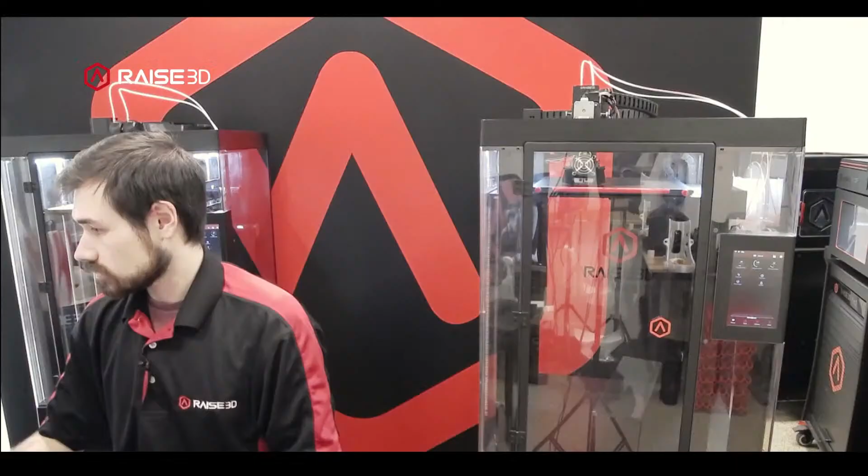So for today, just going over some questions that have been sent in to us. We had some really good ones coming in through social media and our emails and stuff, so I can go through those. We'll just be talking about more general things: the material, the slicing software, our API a little bit, maybe getting into cloud. So topics are going to be really broad today. And then I'll also be doing some maintenance work, some close-ups of just working on the machine and calibrating it.

I know we had a maintenance stream earlier. That's going to go a lot over the steps of exactly what I'm doing, walking through that. But today I'll be working on the machines and just kind of talking about the questions that we have going on. But before I start working on the machine, the one question that I did want to go over initially was someone asked how to print TPU. And there's kind of a lot to go into for that specific material, certain setups and the settings and what to look for when printing TPU.

So to go over that one, the TPU material is a lower temperature material. It's closer to PLA in how you would treat it, but that's mostly just because all the other materials would be a lot higher up. TPU, temperature-wise, is higher temperature than PLA. Sometimes it likes to have the bed completely cold. Sometimes it likes it more at 60. It's going to vary from brand to brand because there's a lot of different types of TPU, so everything might be slightly different.

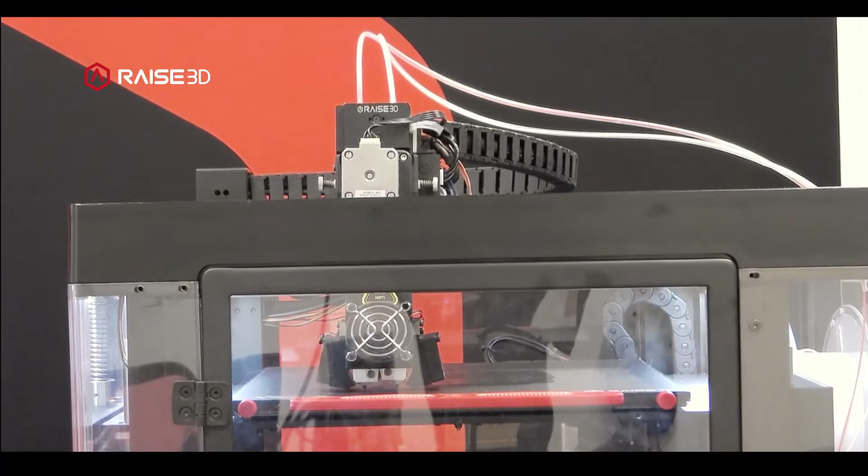With the lid off, so we're dealing with our temperature, the next thing I would want to look at is the extruder tension. Since TPU is not as rigid as any other filament you would be running, we have to contend with the lack of structure as it gets pushed through the print head and out the extruder. For a rigid material, we don't want to fully crank down on the extruder tension. Usually we'll go pretty tight and then back it off 3 to 5 turns to give you a decent tension. That's going to help it feed better.

But for a TPU, we would actually want to loosen this up quite a bit. And typically I'll go to a distance just where we can remove the thumb screw and then tighten it in a little bit more just until it's starting to tighten up again.

Or if I'm running the load procedure from the touchscreen, I can just go in here, start loading. Once it gets up to temperature, it runs the filament feed motors. So while the feed gears are running, I would just load the filament in, have this undone, and then tighten it down just to where it starts loading and the thumb screw can be stable in there. And then that's the tension I would set. So we do want to have a really light tension on the filament when working with that TPU material.

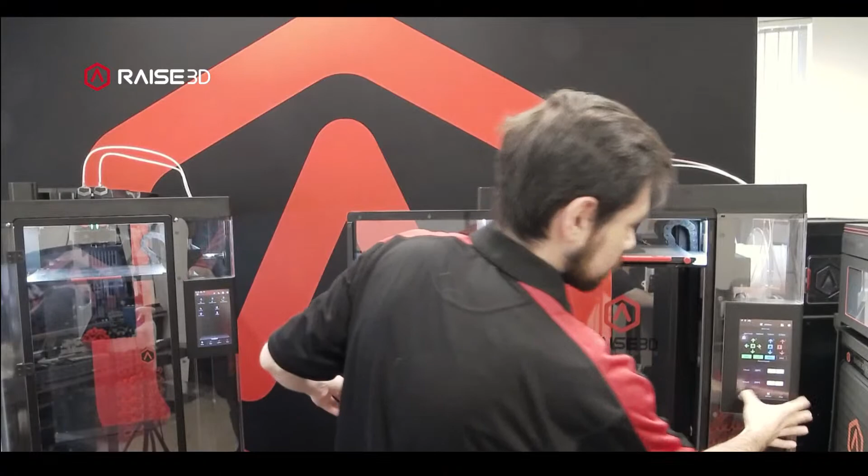So in addition to having the machine set up with that low extruder tension, and then making sure the enclosure is appropriate for which machine you're running, next we'd be looking at the actual slicing settings for these materials, and it can vary a little bit. The biggest ones are going to be something like a Polyflex, a NinjaFlex, and then of course our TPU95A by Raise3D.

So we do have options for running those different materials just under resources at the top of our website, and then under the Open Filament program is where we would find the templates for our TPU materials. So again, if we're working with the Pro 2, we already have those templates ready to go. The ones for the Pro 3 will be coming out in the near future, so you can keep an eye on when those will come out. But working from these materials, there are options in here for Print Life's Yoga Flex. That's a flexible material. And then more specifically, we want to hit those 3 that I mentioned before, looking at the NinjaFlex and the Polyflex.

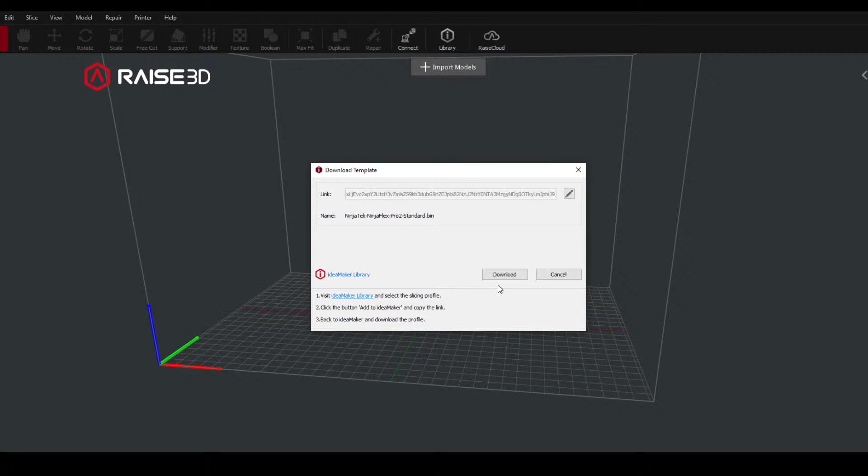So I'll go ahead and do our NinjaFlex profile, import to IdeaMaker. That's just pulling it over with a link. And then with that copied over, since I already had IdeaMaker up, it recognized that I was putting in a link. If not, I can just copy it here and then download. So now I have our NinjaFlex template ready to go, and I'll add that into our NinjaFlex material. So let's see.

Then switching it over to our Pro 2, they just need to see that template. So let me import that again. I think I imported it into the E2, and I do want to have our Pro 2 up for that one. So there we go. So now importing it in, making sure that we're on the right material, and NinjaTek.

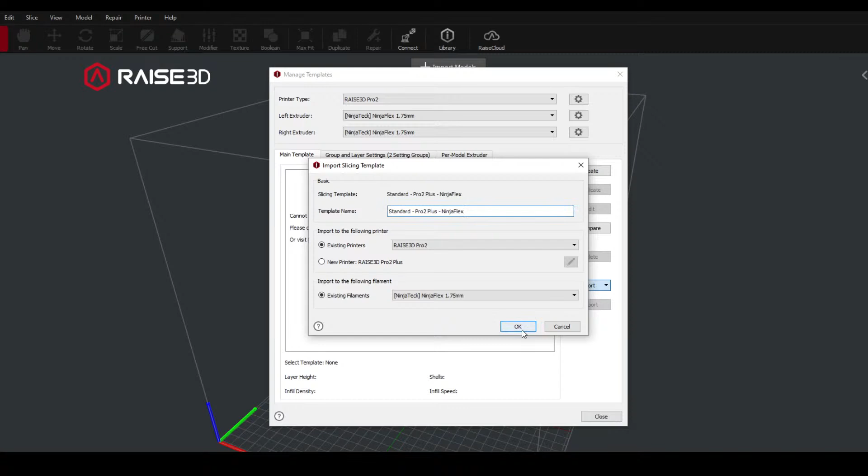So then with the template in here, I'm just looking at the differences between the NinjaFlex template and then our TPU95A, that's the Raise3D one. I can go ahead and compare, pull up the templates here, and then switch over to our TPU95A. Looking at the Polyflex templates, the differences between those are just differences in the flow rates. Fan control speed can be different, so the NinjaFlex does use full fans for cooling, and then the Polyflex will run it a little bit lower. Same thing for the heated beds, they do run a little bit differently. And then a lot of the speeds are different. NinjaFlex is slowed down quite a bit for these templates.

The most important thing is basically starting off with one of these templates to work with, and then from there we can fine-tune things to deal with some of the issues that might be coming up really commonly with TPU. Looking at the Polyflex, NinjaFlex, and then comparing our TPU95 to the NinjaFlex here, we are again running a slightly different retraction amount. The flows are higher on the NinjaFlex, and the temperatures are about the same, but fewer things have been changed from this one to the Polyflex template.

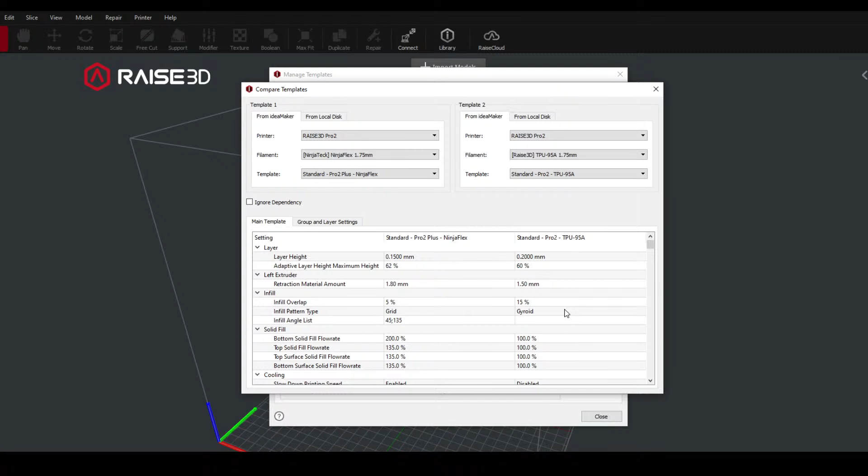But mainly I just really want to reinforce that getting started with these templates for these materials is going to give you the best chance. And then depending on exactly the print results that you're seeing, I would recommend more specific changes. Like we can adjust the temperature slightly, that may help. Cooling, we have the options here. So if we're working with areas that have really fine details, they might need a little bit more cooling or a little less temperature. So we can add in specifically what layers those are taking place, and then change our speeds at those layers. Same thing with the temperature control. If we did have that enabled, we can adjust those and fine tune those. For the other options, usually I see a lot of stringing in TPU, and for that, it's going to help to enable a little bit of coasting distance.

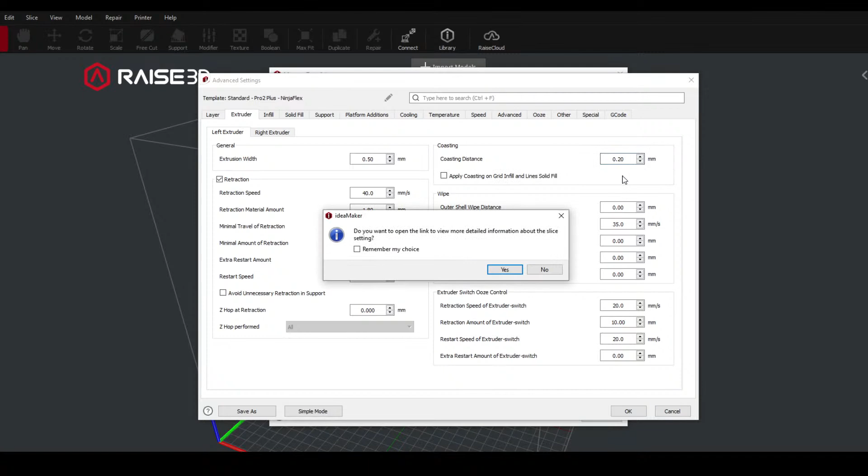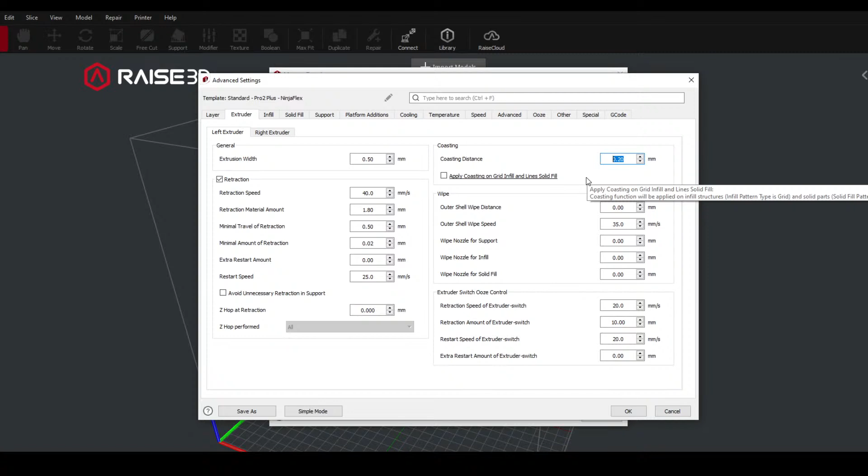Usually I'll do like 0.2 millimeters. Basically, that's just going to stop the extrusion before it gets to the end of the filament path. So any back pressure in the nozzle is basically going to fill that gap and reduce the stringing as it moves past that wall onto the next section of the part. Z-Hop can help a little bit just for that travel, but the biggest one is probably going to be coasting for that string at the end.

And then usually it's difficult to get perfectly clean prints off of TPU. More often than not, there will still be a little bit of stringing, and then I'll go over it with a heat gun and just kind of melt those wisps away, and they really aren't noticeable in the part afterwards.

And then, just going through the rest of the questions here, if there is an N2 Plus trade-in program. I believe that we do have some kind of trade-in program, but I unfortunately don't have all the information on that right now. It's actually best, if you are interested in looking for a trade-in, on our main website, just calling our phone number or emailing inquiry@raise3d.com, just contacting us directly.

Then we can get you in contact with the sales team, and they would actually have information on if there currently is trade-ins and how we would go about processing that and what you'd actually get out of that. But for more information on trade-ins or the opportunity for any machine really, it's best to just reach out to inquiry, or call sales directly.

And so, next question is how to get the first layer perfect every time. And that actually is kind of a more interesting question because it depends on what you mean by the first layer. I'm assuming the first layer is printing directly on the bed, and you would want to have that kind of pristine bottom surface, something that would be closer to something like these, right? Shooting for this level of surface.

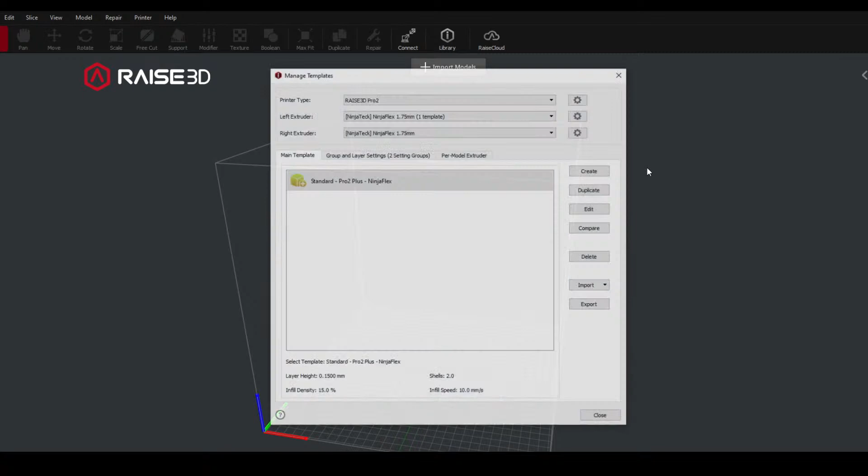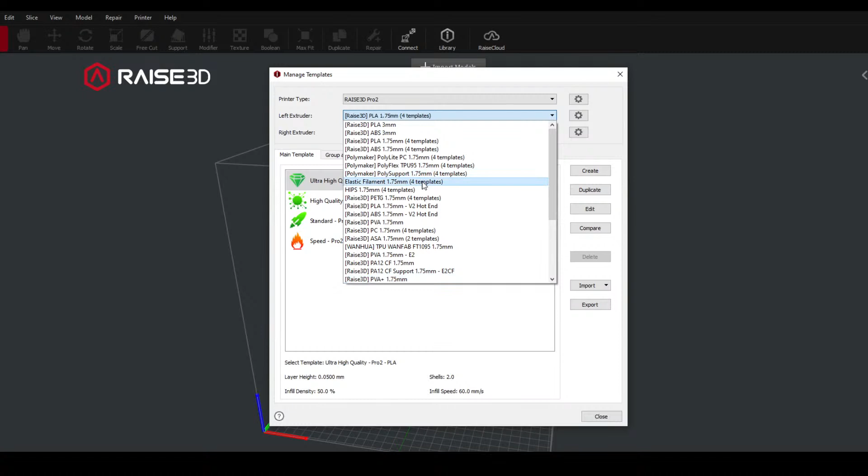Let's see, digging into the question for how to delete an old template. So we'll jump back into ideaMaker. Looking at the old templates, the ones that we can work with are going to be any of the ones that are not pre-built in ideaMaker. All the ones here, the Raise3D stock 4 templates, these 4 cannot be deleted. They're built into ideaMaker. But for any other template, namely the NinjaFlex templates in here, I can just select this template and then delete it on the right. That will get rid of this template.

If I do have imported materials, then I can also clean out the old material as well, clicking on the gear icon next to the extruder material selection, open up the filament menu, and then from there I just go ahead and click remove. And then I can choose which machines I'm removing it from. So we do have options, another pop-up here, to say no, I only want it removed from an E2, not from everything, or yes, I want it completely wiped out of ideaMaker, so we'll just remove everything.

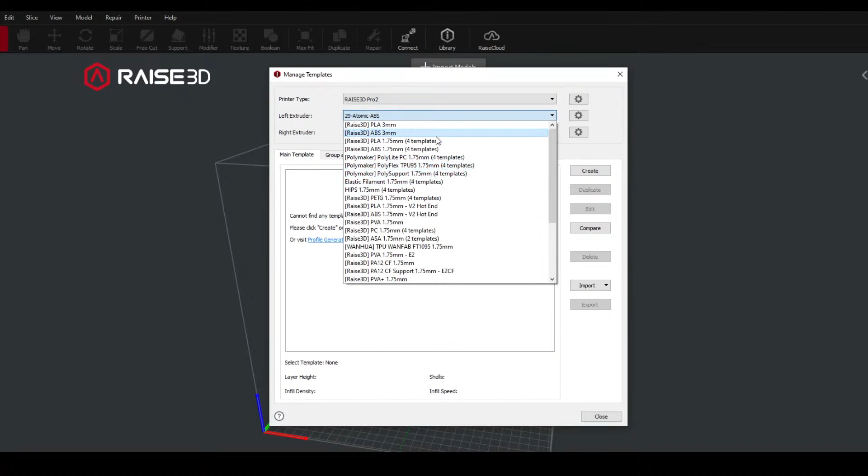And then if we are working back with the default Raise3D templates, typically here I can create or duplicate new templates and then work off of these. And that's the same procedure here. If I have a template that's imported from ideaMaker or imported from the OFP or imported from another G-code, then I can delete those. If I'm creating new templates, I can delete those as well. But the ones that are stock for the Raise3D materials, those can't be deleted.

So on extruder tension. Yes, I did answer the question for TPU before. Sam, if you'd like me to go over it again, let me know and I will touch on those details. I'm not sure if you were able to catch them or not.

And then, is there a way to do a factory reset on the Pro 3? Yes. So getting into the Pro 3s over here, the factory reset options should be in our settings. Then getting into more settings, and right here we have the option for reset. And then here we have the option for restore factory settings.

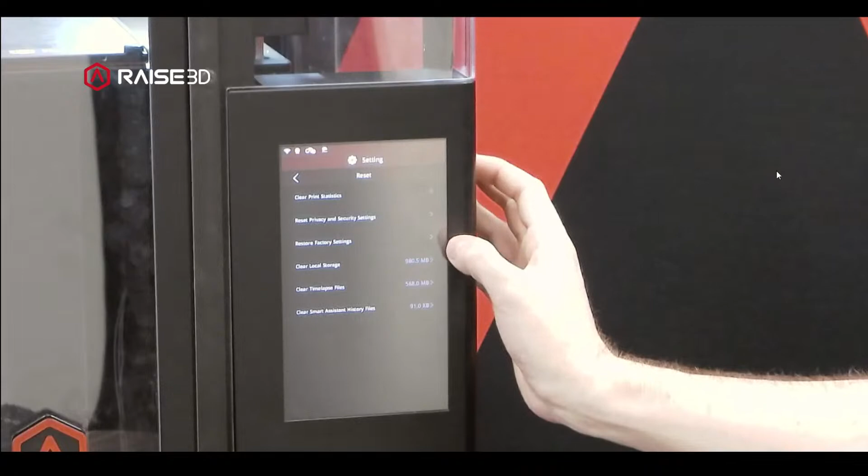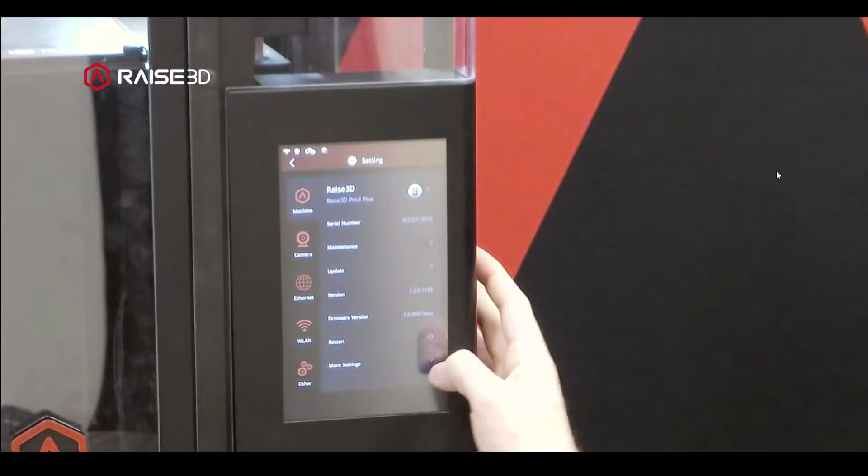So I would just want to go in there, and from here this will clear all of the local storage. It'll also clear the filament profiles that are in here for loading. It'll basically wipe the touchscreen and revert everything back. And again, that's just in settings, more settings, reset, restore factory settings.

All right, so next question. We had a question about steel nozzles. Essentially just, are steel nozzles on the Pro 2 abrasive resistant? And yes, they are, not just on the Pro 2, pretty much on any machine. If we are working with a stock machine, typically for all FFF machines, they're going to be running a 0.4

millimeter brass nozzle. And then if you're using really any abrasive material or anything that has an additive, then we would upgrade to just a more wear-resistant nozzle, and there are a couple other options. Specifically from us, we have a standard 0.4 brass nozzle, a nickel-plated brass nozzle, and then the hardened tool steel WS2 ceramic-coated nozzle. Those are the main three options.

The nickel-plated brass I'll usually recommend as just, hey, if you're trying out a new material or you wanted to use a little bit of carbon fiber, that nozzle, the nickel-plated brass one, is a pretty good go-to. It's on the lower end of the price range, so that's usually why I recommend that one just for getting started. But I think a typical brass nozzle is like $20, and then the nickel-plated brass nozzle is $25, available on our website.

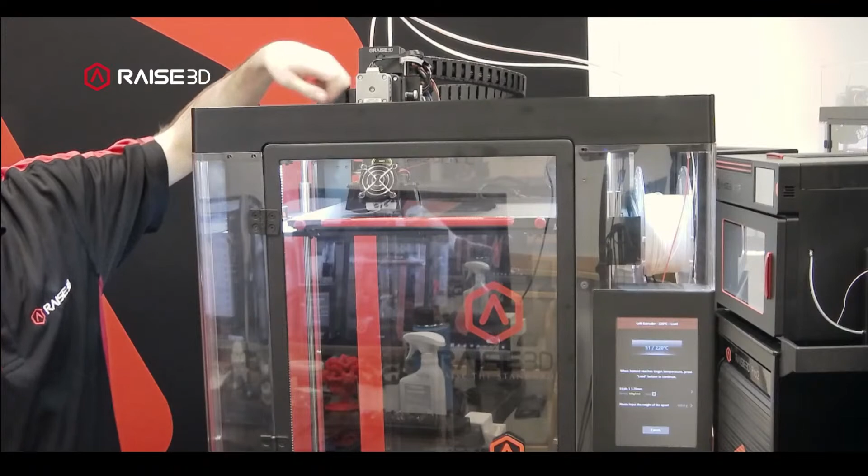What I would go for with that flexible material is find a temperature, look at what the manufacturer recommends for that material. Set that temperature here for loading, and then once it gets up to temp, it will start running the extruder motor in here. And if we have the thumb screw completely removed and the door open, it's really only touching one gear. It's essentially being half extruded, so it shouldn't really be pulled down in yet with the door open and fully loose like this.

Once we put the filament door back in and apply a little bit of pressure, it should start feeding right away. And then you can see right now, this is still basically entirely loose. This is to the point where I would not run the machine here. It's loose enough that it might fall out.

So I want to avoid that, tighten it down just enough to where it feels like it's more stable, that it'll stay. And if it is feeding the material and it looks like it's extruding fine, I would leave it just there. We really want to be as light as we're comfortable with, the softer the material is.

But loading, again, as light as possible while it can still load. And that's why we're running the load procedure as we're adjusting the tension for this. So if it doesn't extrude yet, we do need to go a little tighter. But if it is extruding, then we want it to be as light as possible.

And can the door feature on the Pro 3 be turned off was our next question. And it can. I think it is disabled by default. But if it is enabled and we did want to turn it off, there's an option on the Pro 3s for whenever the lid is off or the door is open, it automatically pauses and waits till everything is closed up again in order to resume.

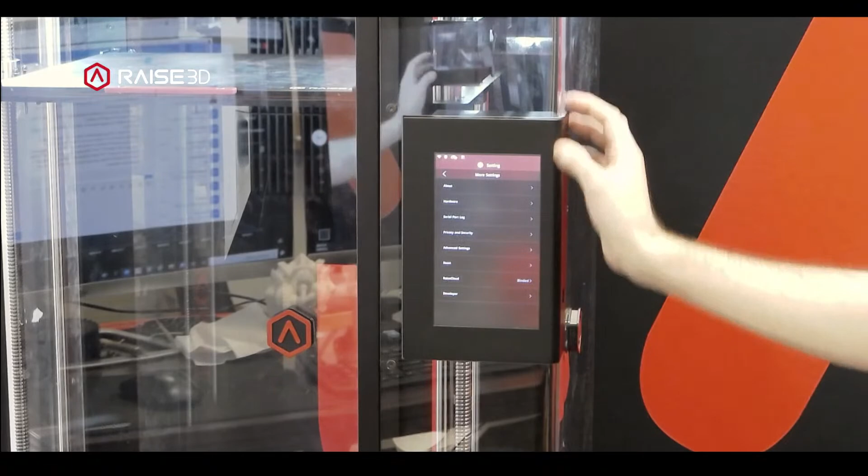If we want to print with the lid off, say we're loading a larger spool in from above, which is pretty common, we just need to go into settings, more settings, and then the advanced settings. So I'll actually go through all of these because there's a lot of things in here that I typically don't get to go into a lot of detail on. These are options for a lot of the extra side features and quality of life things.

So we have use FastStop up here. That's an option to control how it's going to pause or how it's stopping prints. The use monitor should be the filament monitor. So there is an option to have the filament sensor actively enabled or disabled. That's actually going to be down here for turn on filament sensor.

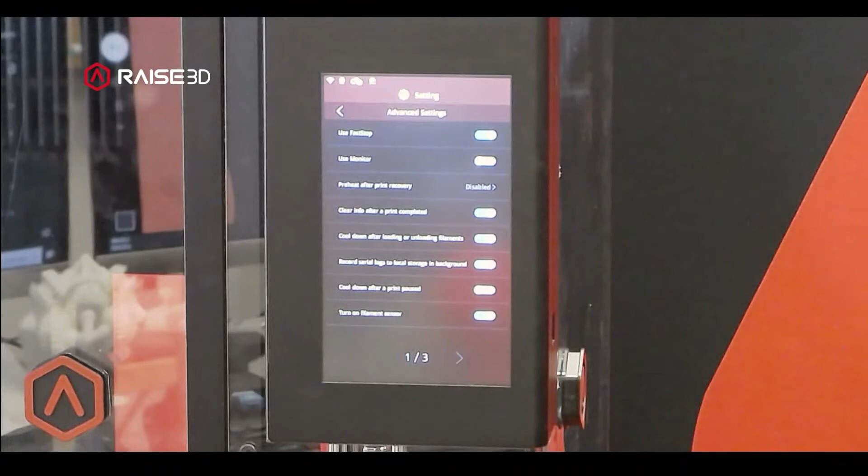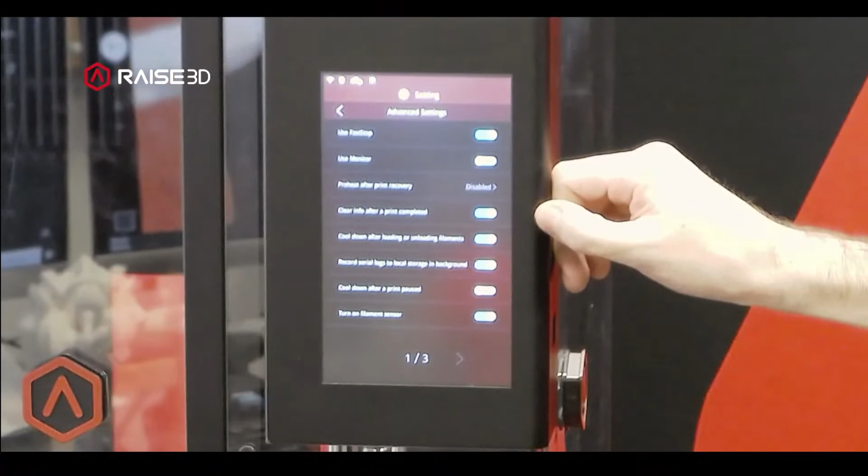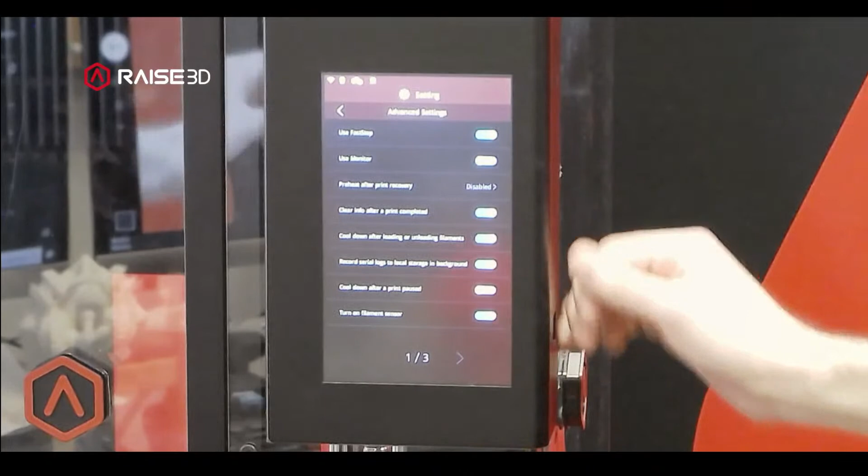The preheat after print recovery: if the power were to turn off and then turn back on, should it preheat again once it recovers that power. We have the options for clearing the info after the part is completed, so just how it handles the display after it finishes the part. Cooldown after loading or unloading filaments, that is another big one.

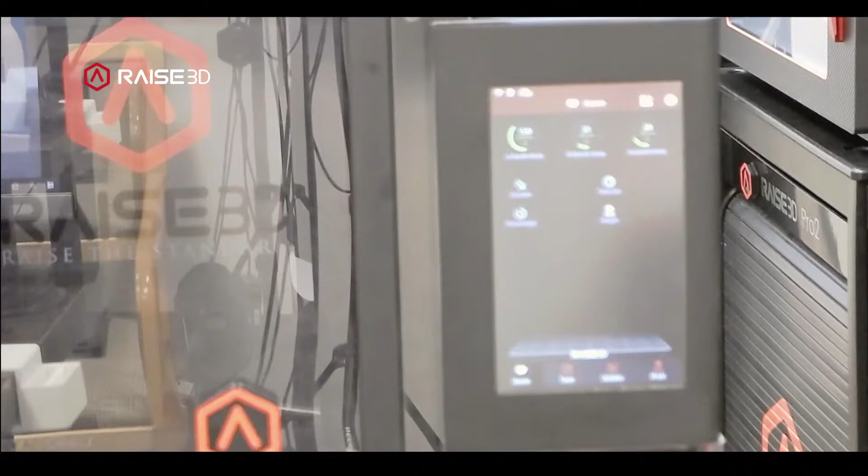So looking over here, since I have the Pro 2's load procedure up, or I should. There we go. It's kind of really close in here. The print head temperature looks like 128 and dropping. And that is because anytime we do a load procedure, it resets it back to 0. So I can manually set our temperature here, just typing in 205 on the display. It's now increasing the temperature to hit 205.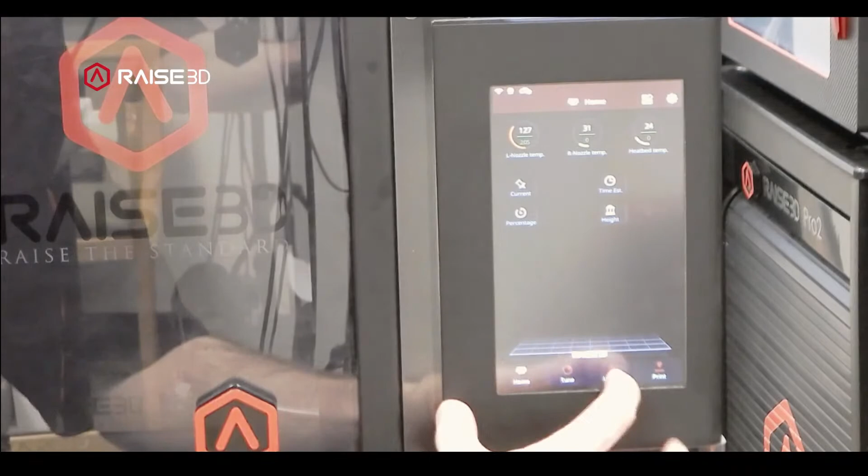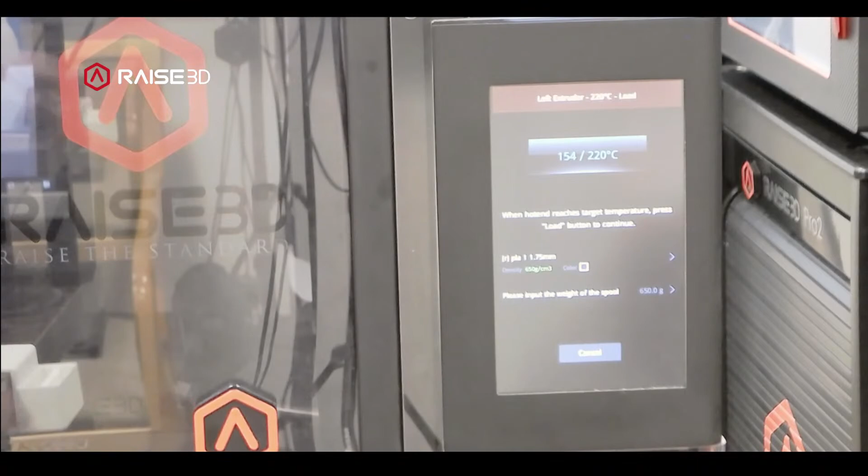If I go into utilities and run a load procedure, it's now overriding that 205 setting that I had earlier, setting the temperature to 220, and once it hits 220, it'll give me the option to load the material. If I hit cancel though, back on the home screen, it does reset that temperature back to 0.

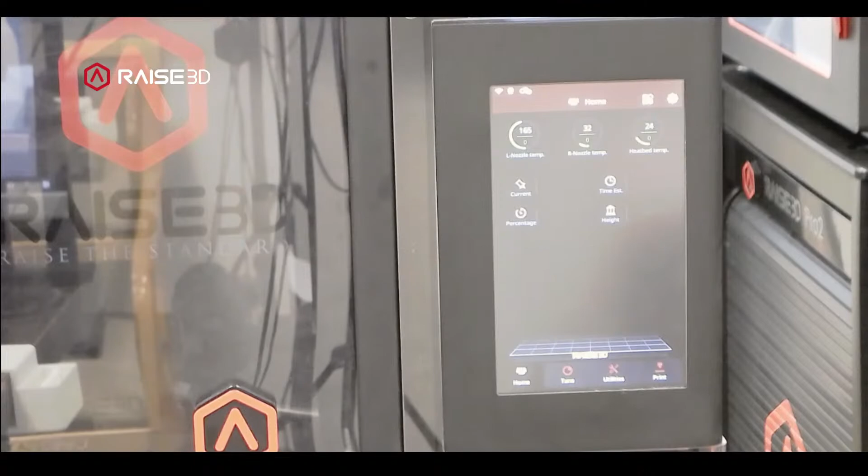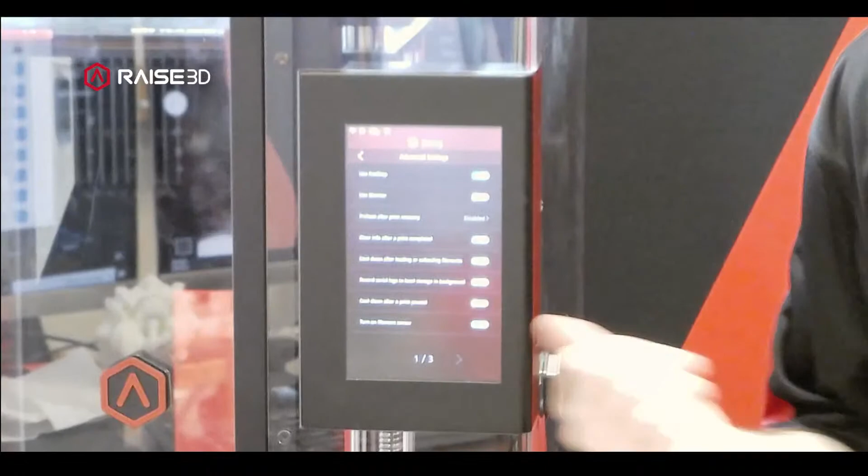So if I'm starting a print right away, I don't want that downtime of it having an opportunity to cool down a little bit like that. We do have the option to make it so that it doesn't reset that temperature after we finish the load process. And that's going to be that option right there.

This is an option for recording serial logs. That one's not too important. And then cooldown after a print is paused, just turning off the active heating while we're pausing. Typically not needed for most materials. Pauses shouldn't be that long.

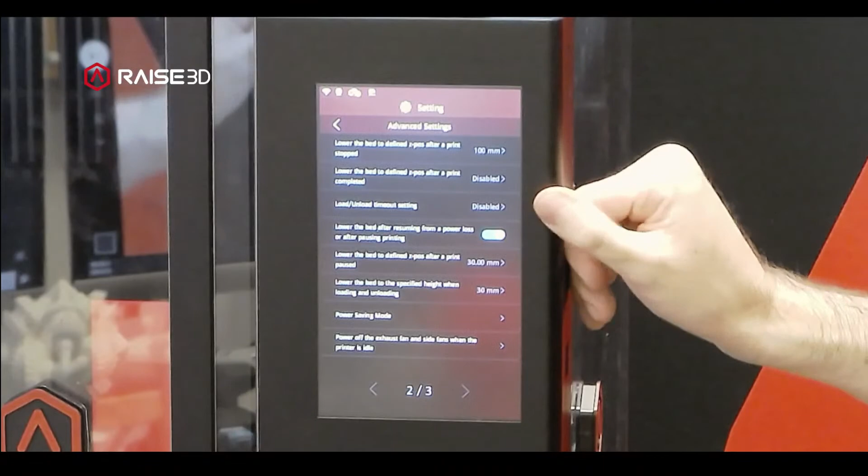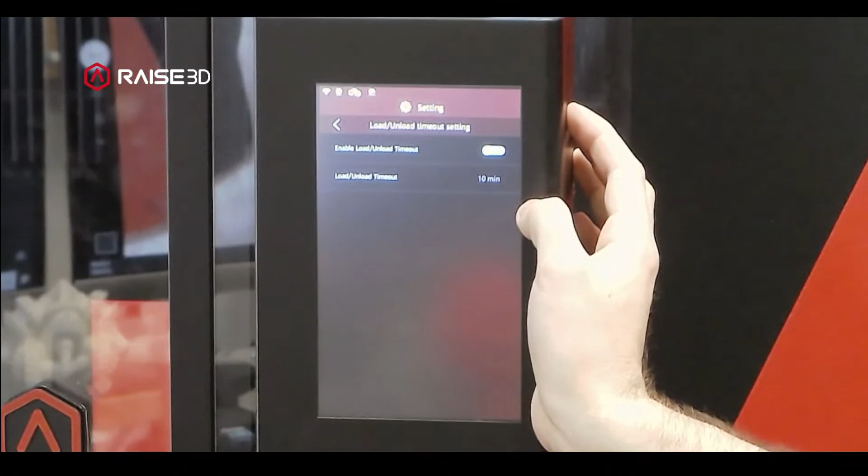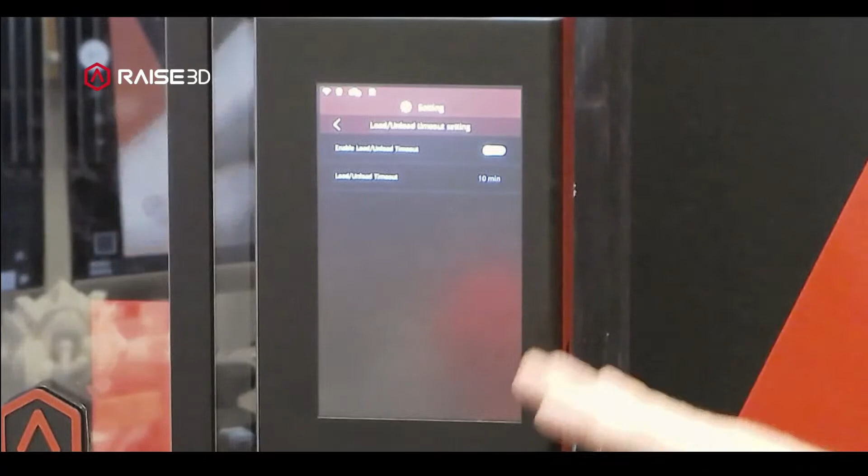And then we have the option to control the distance for how far the print bed should lower after the print is completed. The option for lowering that, loading and unloading the timeout. So you actually do have the option to, if we are running a load procedure, have it actually stop after however long. I believe the options in here would be a number of minutes for how long it's running the load procedure. But that will just automatically stop it. So if for whatever reason you are loading a material and aren't there to stop it, this is going to make sure that it doesn't just run through the entire spool.

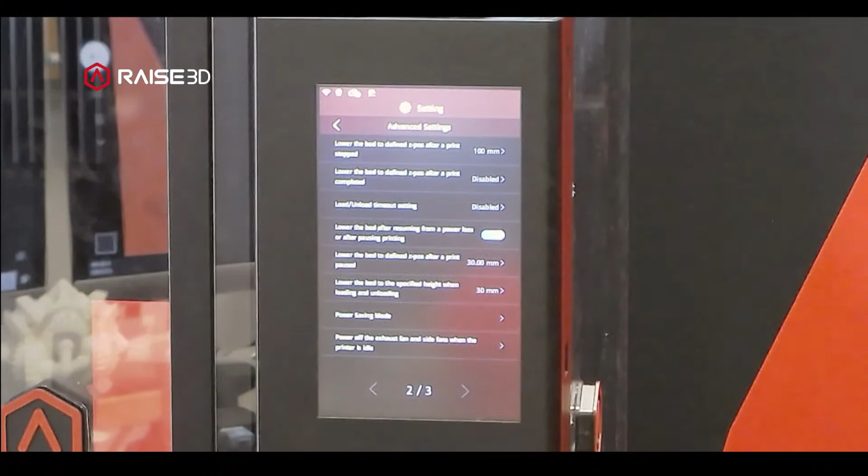Lower the bed after resuming from a power loss or after pausing. So that's just a little bit of an option for, again, how it handles the positioning of pausing and stopping. Power saving mode, that is another option in there. Powering off, just the option for enabling or stopping the fans once it is idle. And then the last ones in here, that last option for pausing when the doors are open, and the setting for a timeout for the nozzle heating as well. So specifically to answer that question on the door pausing, that's going to be in the third page of the advanced settings.

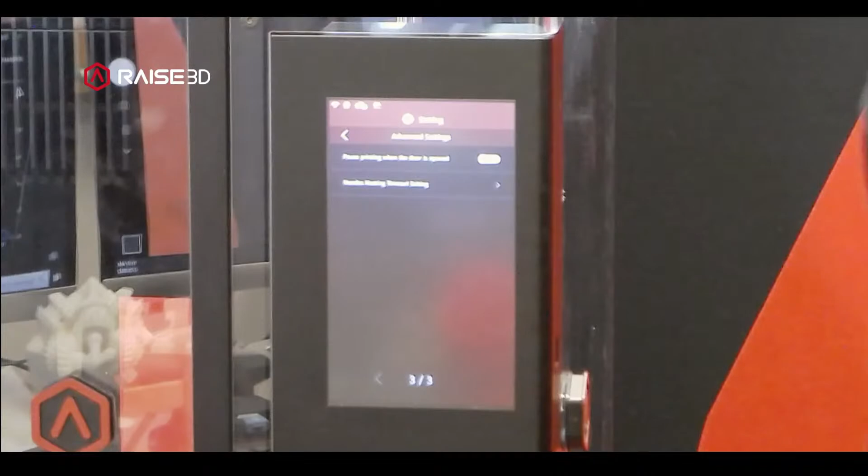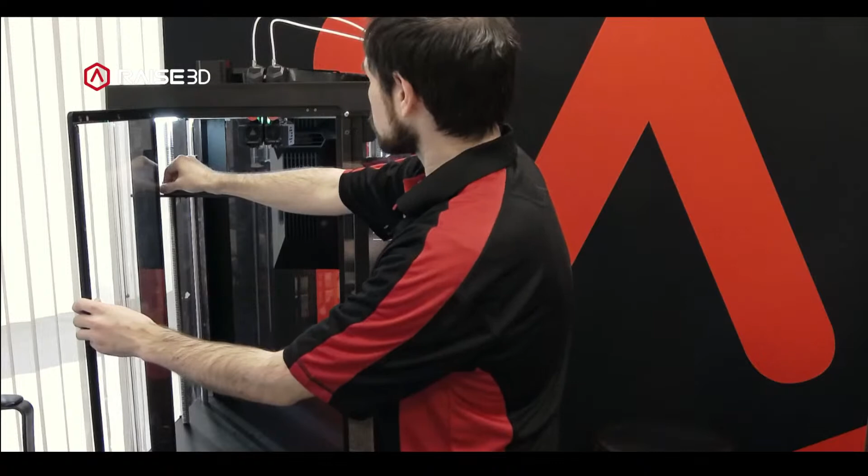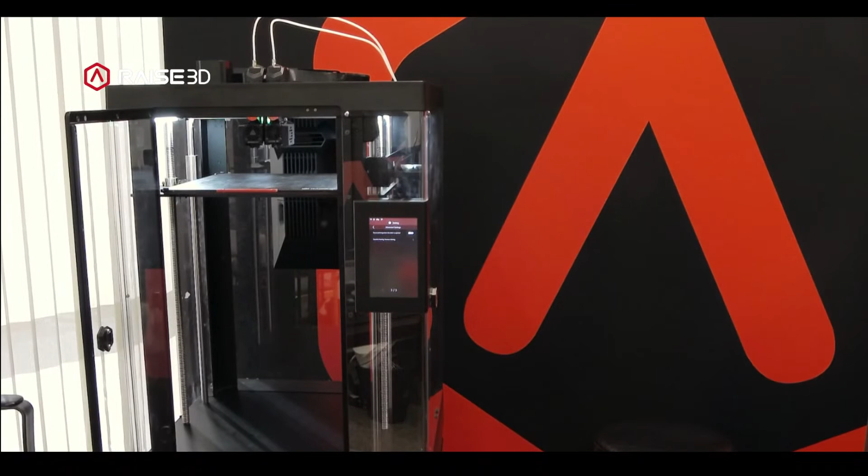Let's see. Replacing the BuildTak printing surface for the Pro 3 using the build plate with a handle. So the process for removing the BuildTak on the Pro 3, there we go. I actually don't know if I'll be able to get this build plate out of here. Someone cranked down on these thumb screws. Give me a second. Well, that is unfortunate. I seem to have misplaced my tools and someone has tightened this beyond my finger strength. But just working with the surface in the machine.

To replace the BuildTak surface, with the Pro 2s, it was, I'd say, a little bit less of a concern because the plates were rigid. So it's easier to kind of get under those and just peel them off entirely. On the Pro 3s, since they are that flexible plate, it's going to be the same process of trying to get underneath it and then peel that surface off. But I would be a bit more careful in how that surface is separating and making sure that you're not holding it in one hand and kind of pulling with the other. We just don't want to bend the surface too much while we're trying to remove it.

So I find that what I'll do is I'll put it down on the surface, kind of peel back the BuildTak a little bit, and then almost push it and slide it off, and that kind of peels off that section. But it's just not a full pull and lift and bend the plate. I'm trying to keep the plate as flat as possible, and then just kind of periodically peel it off and push it further back. That's the best way to get it off.

And then once the surface is off, just wipe it down with 90% isopropyl alcohol. And then typically I'll put alligator clamps on it just to keep things in place, peel back one corner, lay that down, and then push all that out. But I believe we have a video that will show more of those steps on how to actually replace that BuildTak. But the process is going to be the same for the Pro 2, just carefully removing the surface and then laying down a new one, clearing out bubbles like you would for a screen protector.

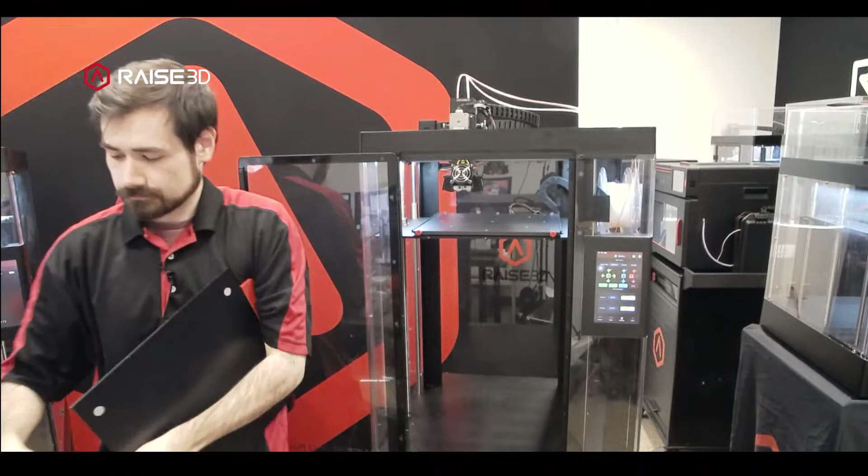But you would just go ahead and, with one of these here, apply it directly to the surface itself. You do want to make sure that you actually have the printing surface on top of the platform, not just the platform. If you're printing directly on the metal, really no amount of adhesive is going to work with that. It does need to have this surface.

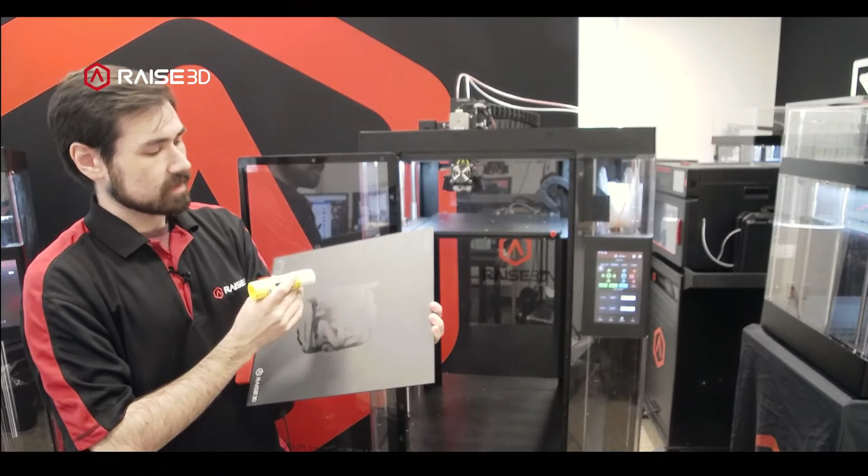The general technique for applying adhesive to the surface, I'll usually go in horizontal lines or lines in one direction, and I really want to cover the area where the part is going to be and a little bit extra. So I give it an inch of space around the part just to make sure that everything is fully covering that area. I'll do lines in one direction and then go back over it the other way to make sure that I've fully coated that area. And then that's definitely enough.

Just going through there, it was basically 3 to 4 passes going in 2 different directions, making sure that I get full coverage of the area. And basically that surface is ready to start printing on. But making sure that things are very evenly laid down, evenly coated, and changing your directions like that helps a lot to make sure that the adhesive is properly applied.

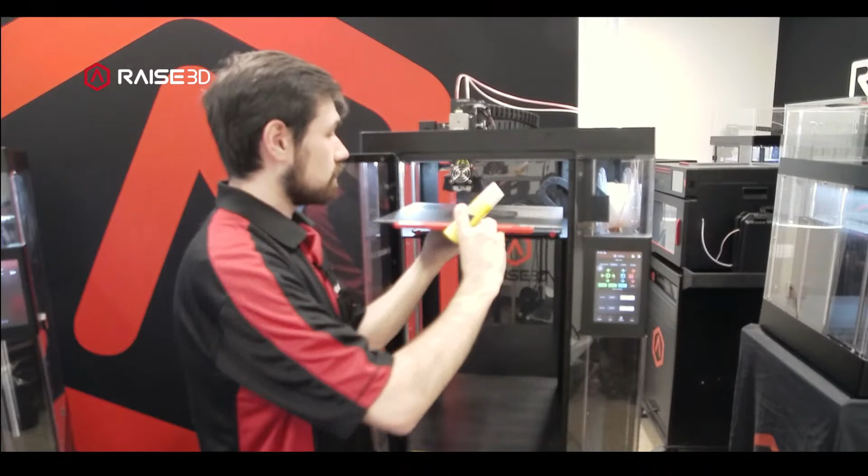And then usually all of the adhesives like glue stick and Magic Glue are going to dissolve in water, so we can just take the build platform, run it under water and wipe off all of the residue, then clean it off with 90% isopropyl alcohol or higher, and then reapply that layer with the same technique. So if we are using adhesive, we can reuse the same surface and refresh the adhesion on top of that surface.

Okay, and I did just see, Magic Glue on the BuildTak. Yeah, everything that I just described is what you want to be doing for that.

But it is enough to slow down that cooling for all the materials that need it and give them the ambient temperature that they need. It's really for the most extreme temperature materials like PEEK and PEI that need an actively heated chamber to maintain that high temperature. But for all the materials that we run, running the bed with the machine enclosed is enough to keep a high enough ambient temperature that I don't have to worry about how those parts are working or if they're getting too cool.

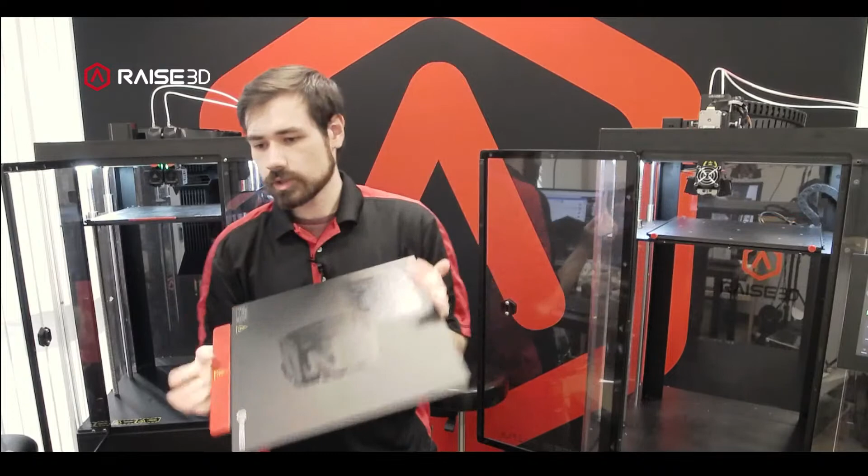Is there a textured build plate in the works? I believe that as far as the build plates and build surfaces go, we are sticking with the BuildTak surfaces, but for the Pro 3s, I believe we are having options for other build plates coming out. Normally it'll have the flexible plate, but if you did want to go back to the rigid plates like on the Pro 2s, I believe we are coming out with other options for those. I'm assuming the textured surface you're looking for would be like the PEI coated surface. I do not believe that we have plans for any textured surfaces like that, at least as far as I'm aware.

And then, so what do we recommend for printing PP with the Pro 3 series? So yeah, polypropylene is a very tricky material. That's probably one of the most, I wouldn't say aggressive warping materials, but it does have a lot of warp on it. If we are running the polypropylene materials, there's a couple options.

I believe that BuildTak does make a polypropylene additive that would be put on top of the surface. That one has worked as a good kind of, hey, I want to use this machine for polypropylene and everything else. You just put on the BuildTak polypropylene additive and then print on that. I would recommend that one.

The Magigoo also has a polypropylene additive that I have used as well. That one still does work, but I think I would probably say the BuildTak polypropylene maybe was a little bit better, but I would really want to go back and double test them again. The one that I had the best results with, PP Print, the company that makes the polypropylene off of the Open Filament program. If you go find them, they're alphabetical.

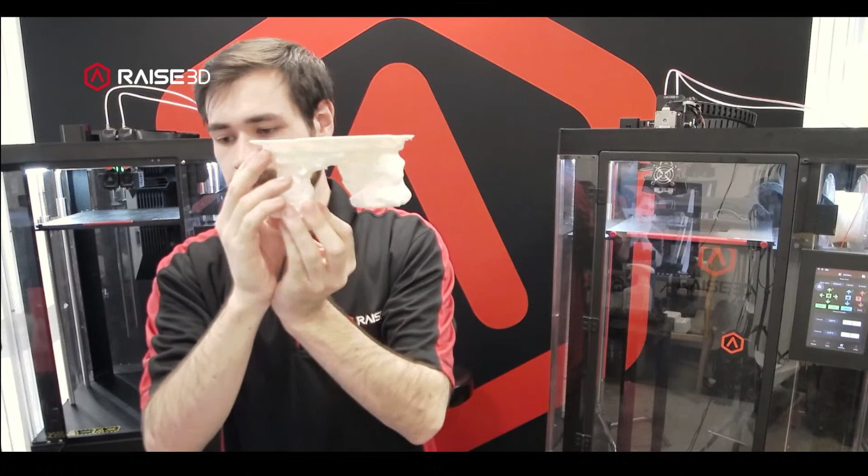Just as an example for the polypropylene results, this print, I know it's all kind of white and blown out, so it's difficult to see the details. But this print is all polypropylene, and this was actually printed in this orientation. So all of this in here is supported. And using the P support material, essentially printed out all the support structures underneath this. It is treated a little differently in how you remove it.

It does like to be dunked in essentially boiling water, and that softens up the support material, and you almost remove them like a gum. And that's how they recommend to remove it. So I would follow their instructions on removing that P support. But yeah, the P support with the P surface, those are the best results. Second to that, I'd probably say the Magigoo PP and the BuildTak PP additives on that same surface are going to be the next best one for polypropylene.

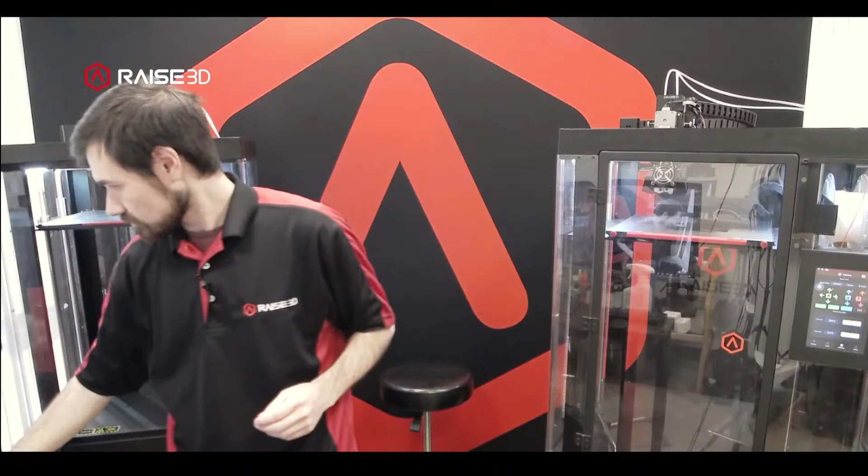And then let's see, is it possible to print with one nozzle and support in the other nozzle? Different colors, to help differentiate what is the part and what is support. Yeah, so if we just wanted it to be for that specific application, just having two different colors so you know what needs to be removed.

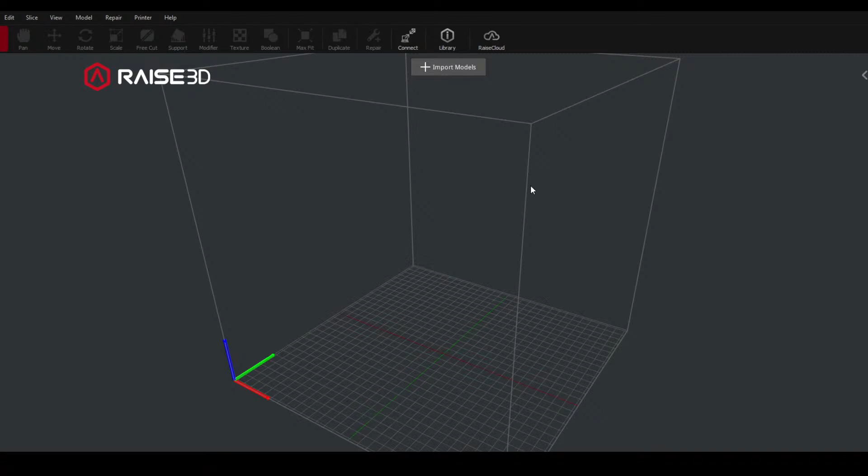If we are working with materials that are similar in the final material properties, so like a PLA and a poly support that's actually made to be a pretty decent breakaway support material, we can just bring in one of these parts here, bring in our fan duct, clear out my group and layer settings.

The main thing to do for a poly support, if we're working with just a standard PLA template or any other template, if we're using the same exact material, just to have a different color for the supports, all I need to do is go into the template, click on Edit, and then under the Support tab, set the support extruder to the right extruder, and then that's just going to run with the right material. I don't need to do anything else if I just want it to be a different color.

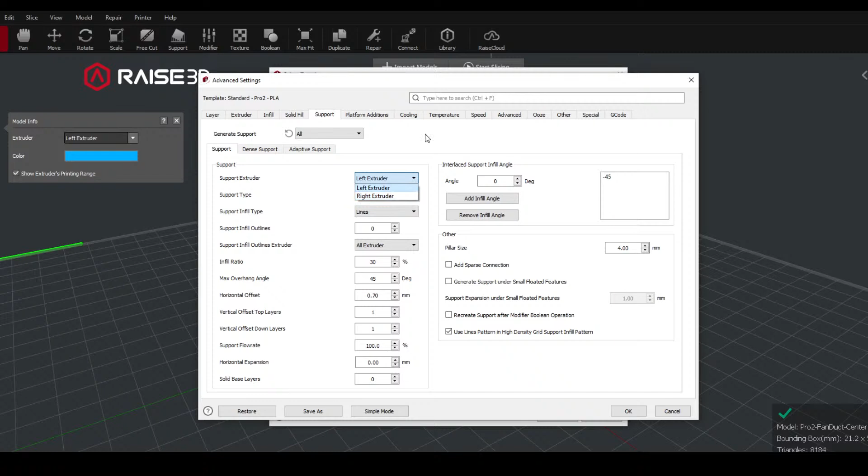If I'm running a slightly different material, then I would want to just match the temperature for what's recommended, say for poly support, and have that set here, and it would still follow the same parameters for using PLA. Under the extruder tab, this has all of the options for things like the extrusion width, the amount of retraction, the travel, and things like that.

If we are running different materials, sometimes we might need to get into the right extruder configuration and enable a different configuration. This basically allows the left and right extruders to run different settings from each other. So I think the TPU likes to have a 0.5 extrusion width in some templates. We would need to match that.

And then also just making sure that cooling is going to be the same for both materials, as well as the temperature range. The temperature and cooling compatibility is really important if you're doing any combination of those. But for a really simple one, things are pretty similar: right extruder, and then making sure your temperature is set correctly and that the cooling is the same. PLA and poly support, that's really all you need to do to get that combination going.

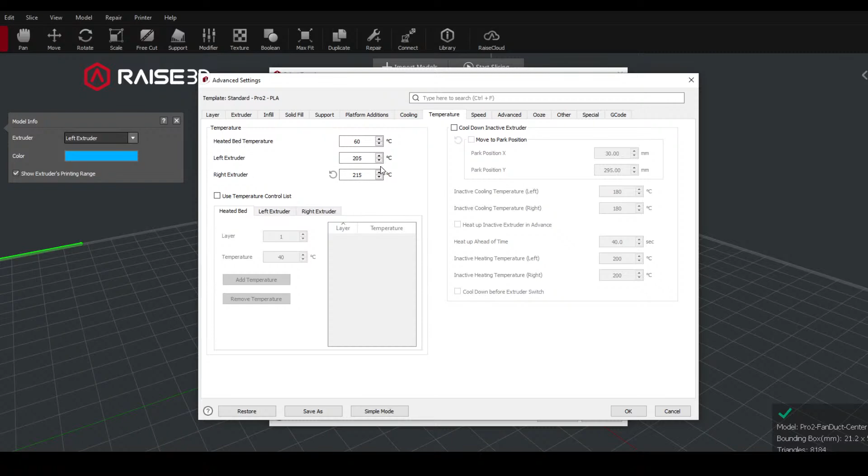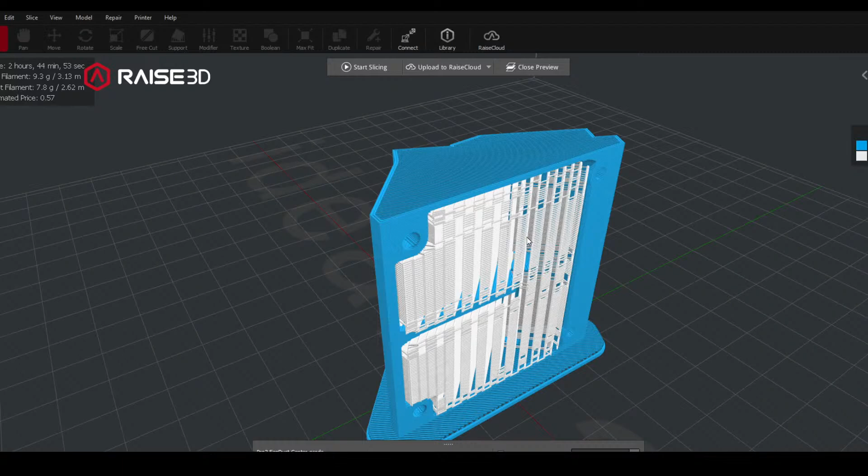And then just to see the slice preview. To confirm that we do have the parts set up for the left and the right, I always go through our preview here, and then look at structure extruder color. Yes, we are running the part out of the left extruder, and all the supports are just being run off of the right side.

Let's see. Oh yeah, someone did ask about the disable icon. So just to clarify on the utility screen, the printer Z offset adjustment: why does it always have the disable motor icon, and is there a way to make that go away?

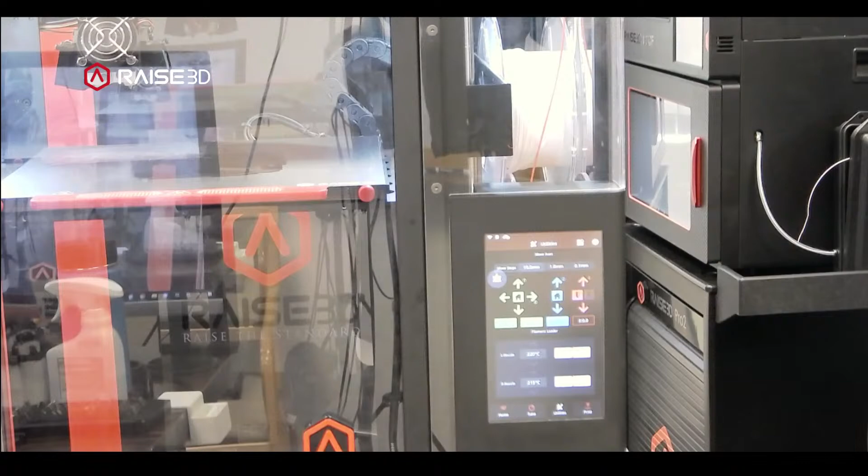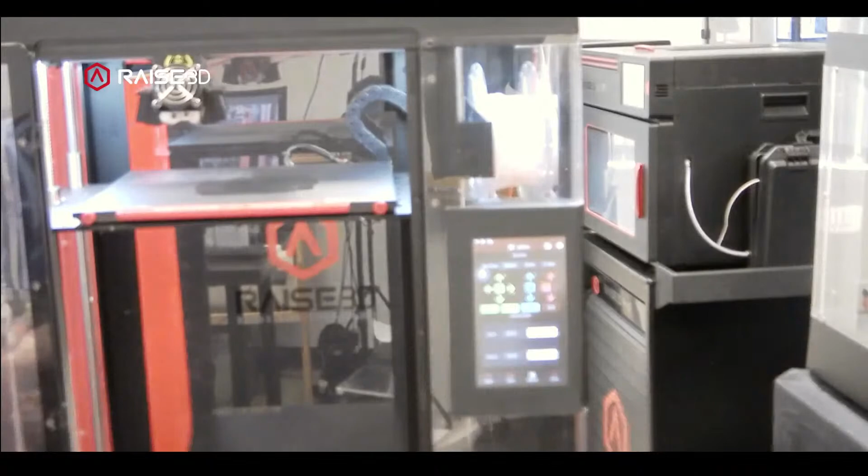No, the disable motors icon is always going to be there as a button and not a status indicator. But any time that I need to move the print head or want to work with filament or the extruder motors as well, disabling that disables everything. Then I can move it safely by hand, but that icon is always going to be there.

Okay, and then I think the last question that I'll touch on, unless we get anything else in chat: is it possible to change filament if during a print it finishes? I think what they're asking is, is it possible to have it switch over if it runs out of material? If we have 2 spools in here and we fully run out of one spool, does it know that it has another spool available, and could it switch over?

There's a lot of stuff that goes into why that's complicated to do. It would essentially need to be able to rewrite G-code on the fly, which it doesn't do. So it is possible to set up something similar, but it does not automatically do that on its own. The way to set up that similar process would be looking at a part like this. We're looking at about 10 grams of filament.

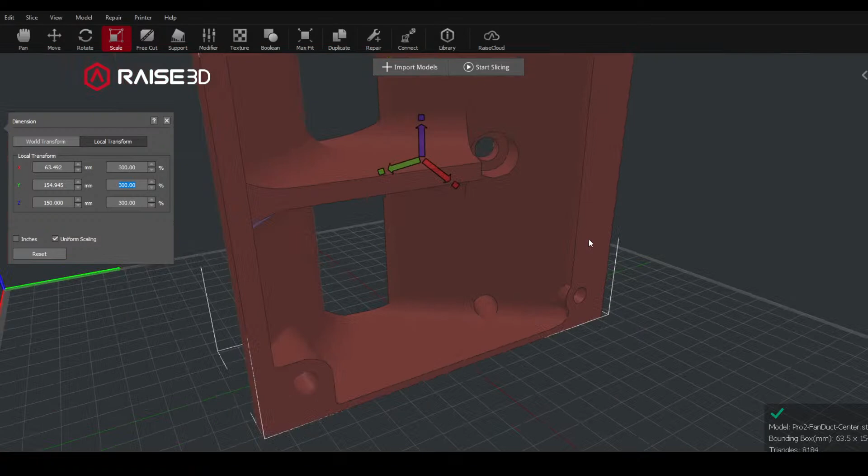If we were to scale this up, essentially what we can do is I can scale up one body, 300% should be close enough, and get an estimate of how much material this would take. So if we want to switch it back, I'll restore everything. We'll go ahead and max out our infill usage just so I'm using a lot of that material. Yeah, we'll do 30.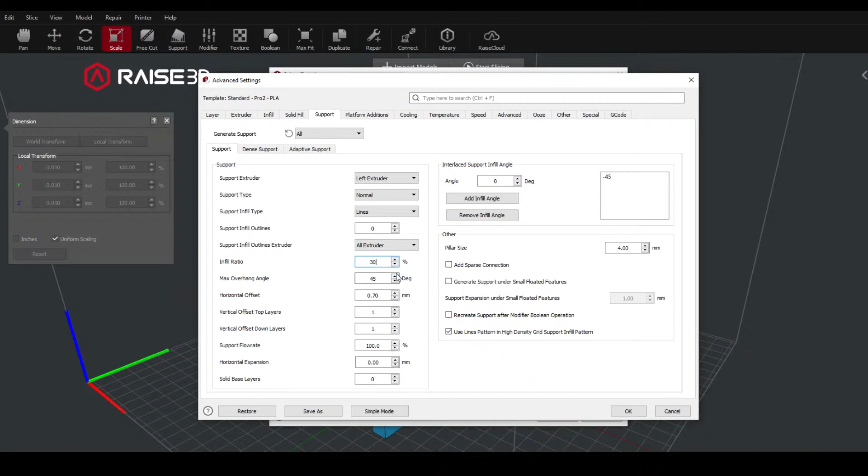There's a little bit of a process in order to set up something like this. If I intentionally knew that we were going to be using upwards of one spool on any given print, I would really be setting the part up ahead of time to know it's going to switch over partway through. So I can either run the parts and supports. That'd be a good way to transfer the material.

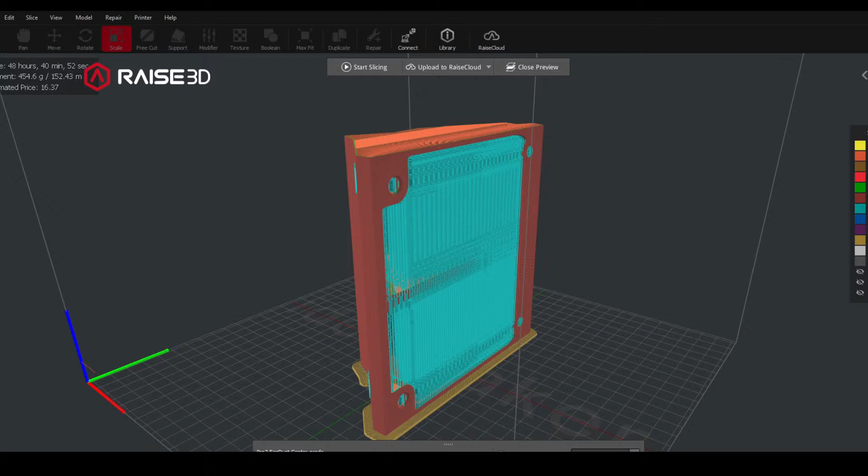Yeah, this one's not even using a full kilogram, and it is also still one color. So I'd say we're probably doing maybe half and half. But I would basically want to go in here and find a part where I know that it is going to use a full kilogram of material for half of the part.

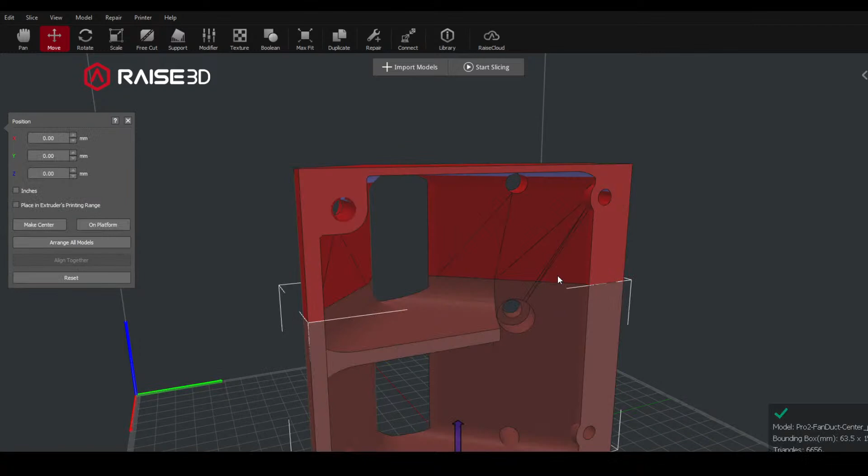I can bring up our free cut tool so I can set a cut plane. I'm only working specifically with the height here, so I can split this. This gives us our 2 part bodies. They do have non-manifold edges because of the cut that I put in, so I want to just repair those really quickly and make sure they go back to the correct color. That one did have a little bit of a face issue there, so I'll leave that one alone.

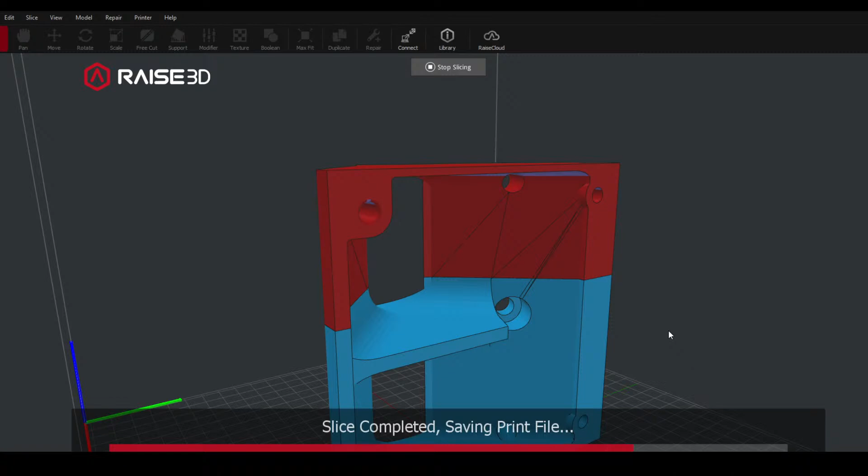We can go ahead and have our upper section set to the right extruder, and then we should be able to reslice this. Just really knowing how much of the part I'm going to need for the right, cutting it, setting that section to the right extruder, and then just letting one of the 2 extruders also handle the supports.

That's the one caveat, that not everything switches over. It's going to be easier to just have the supports printed with one of the two extruders, and just have it split so we know we're using more material for the right side there. And that, of course, basically fluctuates on where you set your cut placement.

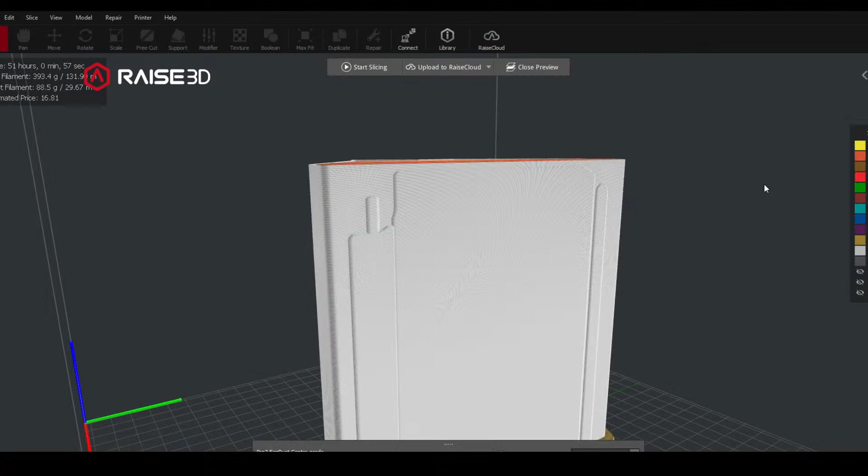But yeah, and then looking at this one, I would also probably go into the advanced settings and either just change it to a wipe tower. That's going to be probably easier. It doesn't need that much space to wipe off on that, or you can disable both of them, since again it won't be using one of the two extruders for most of it, and then it switches to dual partway

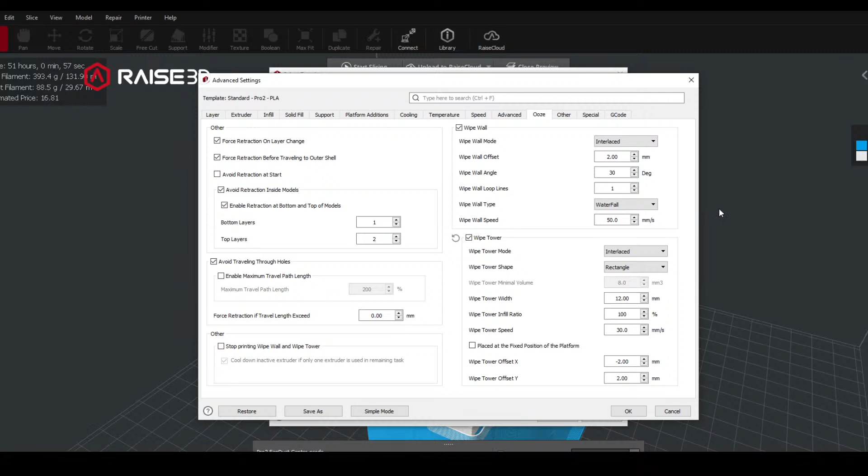through. So we have options on how we want to handle that ooze, but really if we did want to set up a pausing or a switching like that, that is essentially how we would do it with these machines, how they are currently set up.

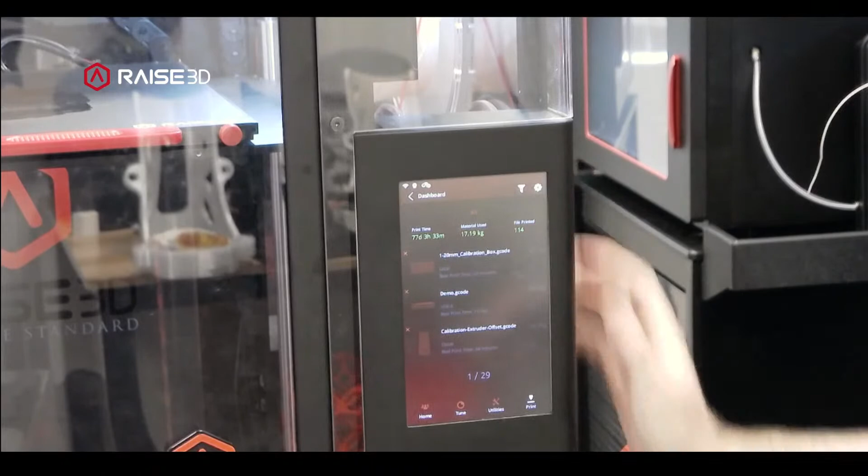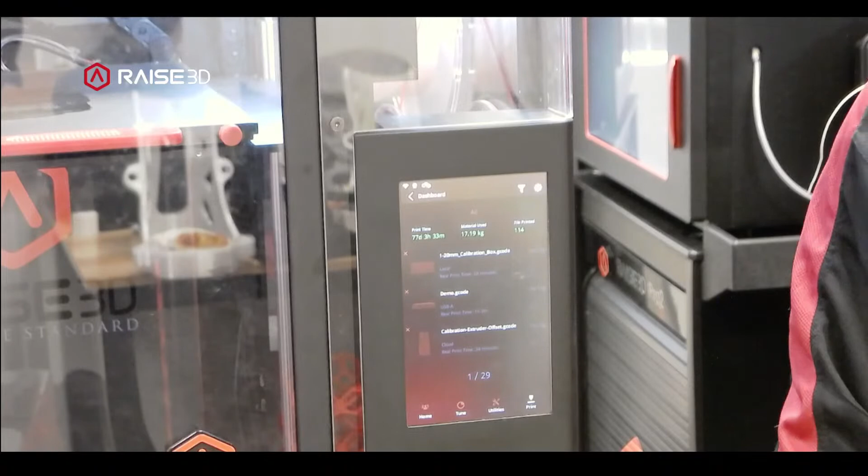So if we go to print and then dashboard on the right, up at the top here we have print time, and that's the total time for all prints on the machine. So I'm looking at 77 days on this machine. Every 300 print hours is every 12 and a half days according to this. So basically just keeping track on that, 12 to 13 days, come back in and then relubricate the upper gantry.

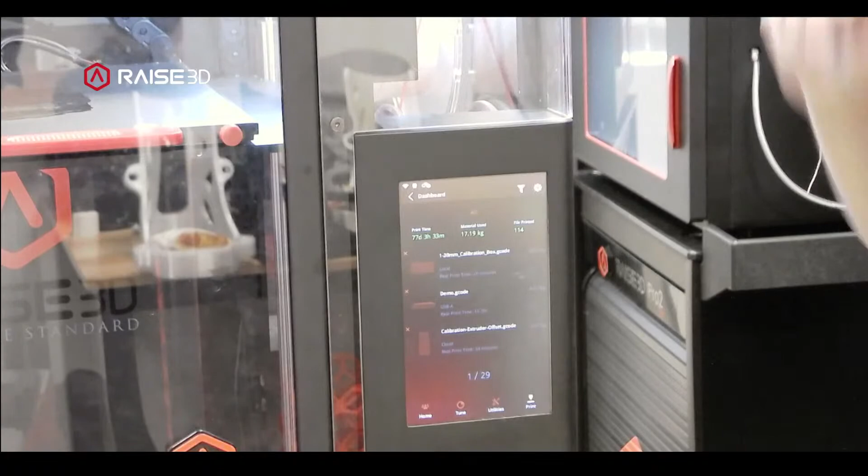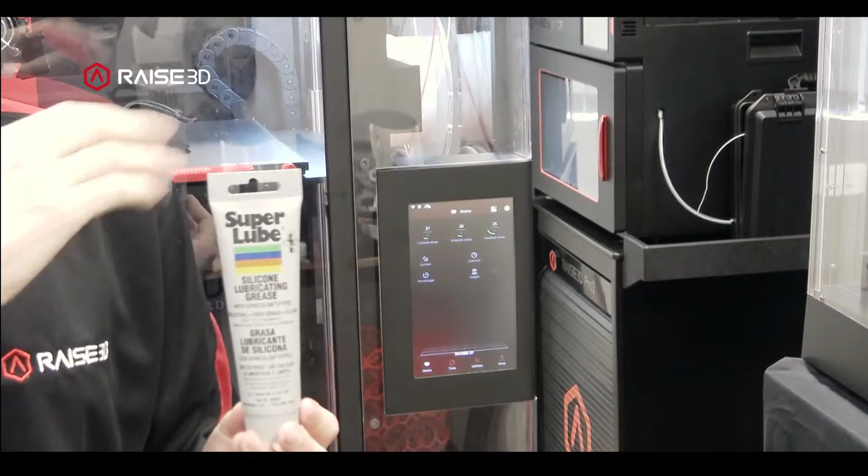And the material, or what we recommend, is going to be this one. On these machines, we will run Super Lube silicone lubricating grease with PTFE. I believe the specific one is part number 92003. But yeah, if you wanted to figure out more about this one, just email us or open a ticket for tech, and we can send more information on this specific lubrication that we use. But it is a silicone-based lubricating grease with PTFE is what we recommend.

And then recommended ways for removing rafts. Someone else did ask. So for removing rafts, it depends a lot on the material. If we are working with like a PLA, usually those don't adhere too much, and more often than not, just removing a raft should be basically as simple as holding the part and peeling it off the bottom.

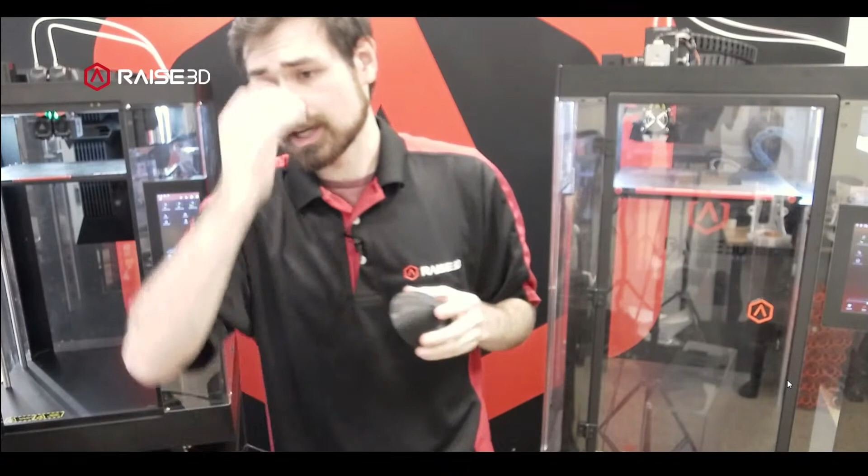If they break off, or if they do still stick on, then I'd say using a thin scraper or something we can maybe try and get under there and separate them. It's kind of the same process as thinking of how to remove parts from the Pro 2 surface, kind of the same idea. But if parts are sticking really aggressively to the rafts like that, and it's not easy to peel them off,

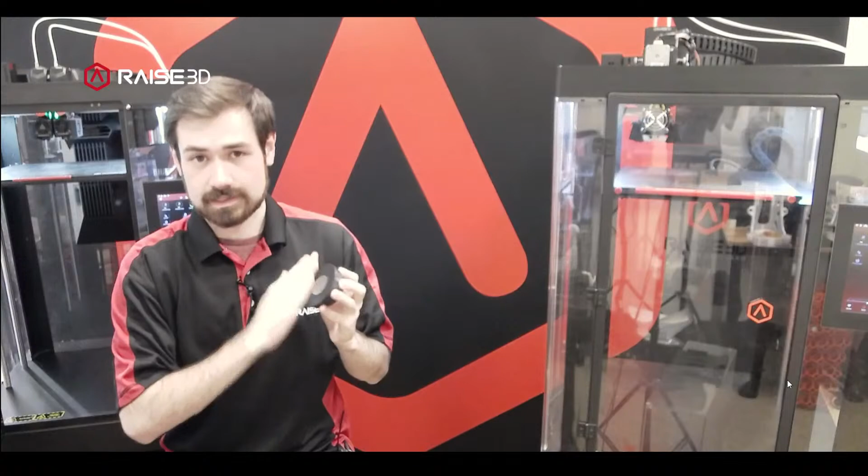or it's too difficult to get at them with tools, in ideaMaker there is an option under Edit in the Advanced Settings under Platform Additions. We can set the specific value for the raft gap from model. So if we increase this value, that will make the rafts easier to remove. If we decrease this, that brings the part closer to the raft so they bond a bit stronger.

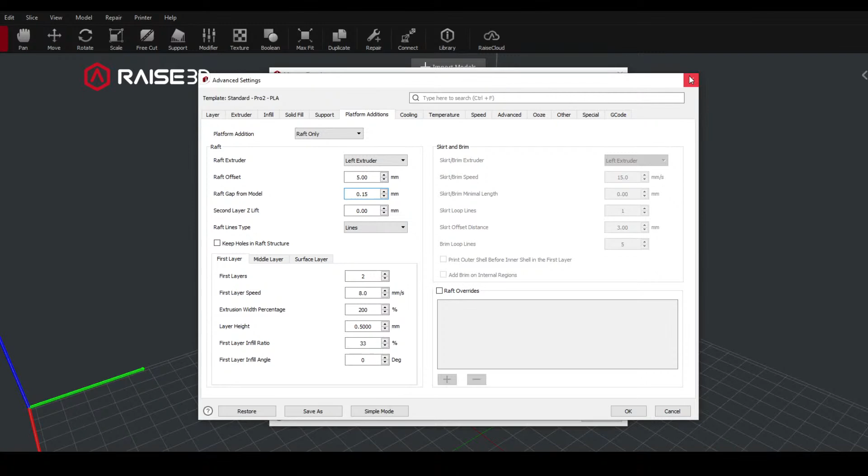If we increase it too much, then we might get really rough, ragged surfaces, or the parts will not stick to the rafts at all, so you want to be careful about that. But just increasing this value a little bit should make those rafts easier to remove to get you to that point where you would be able, again, to just go ahead and peel them off like that. Adjusting the raft gap will make that more possible.